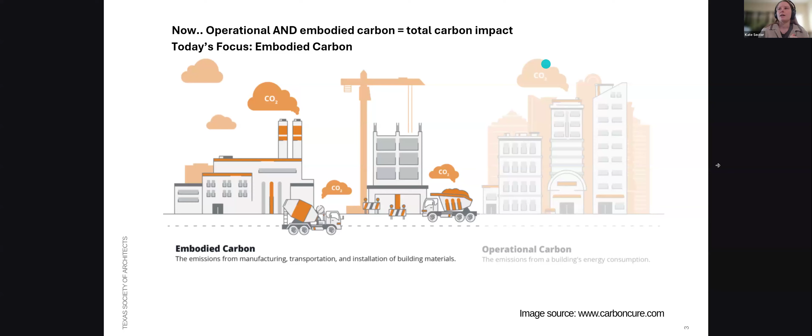But when you put those things together, we get our total impact that we can have as architects and the built environment. This topic is really important because, in addition to our building operations, we also are able to impact our carbon emissions through the materials that we select. Something that we really have a true impact on, especially certain materials like iron and steel, cement - these have quite a big impact globally on our carbon emissions, which is why we're really trying to hone in on how we can impact carbon emissions beyond operations.

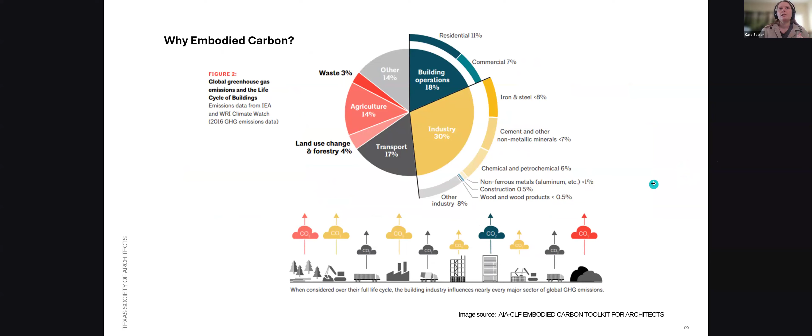One of the things with materials is that we select them right away, and so that carbon impact, that upfront carbon impact, is something that you see the second that you select those materials and they get implemented, versus operational carbon, which is the whole lifespan of a building. Both are equally important, but when we think about things that we can do right now, today, our materials are extremely important, which is why we want to see people reporting these impacts more and more.

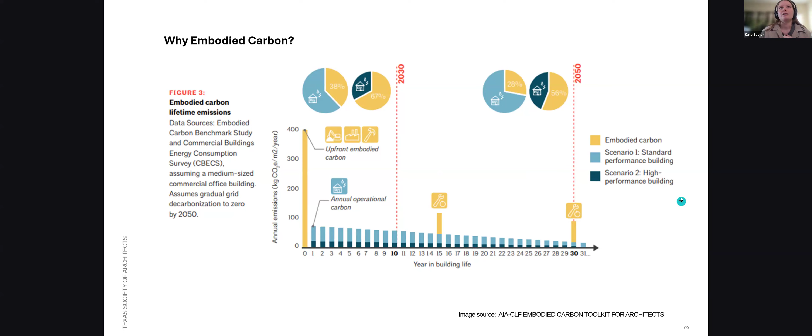If you're not familiar with how to measure embodied carbon and some of those life cycle impact stages, these are some important terminologies to know that you'll see in the 2030 reporting project categories.

So you have your product stage, which is A1 through A3. You see these on things like environmental product declarations. This is the material extraction, transportation, and manufacturing of a product.

There's construction phases, which is A4 and 5. Grayed out here, I have the use stage, which is actually, part of that is the maintenance and repair, but also your operational energy, which is a separate reporting category, and then the end of life situation.

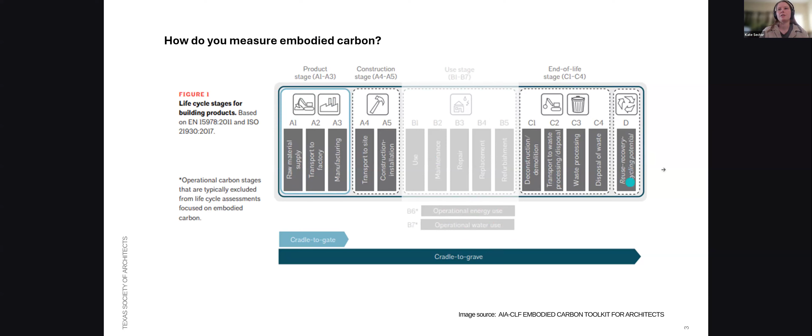All these graphics that I just showed are part of a really great resource that the AIA and Carbon Leadership Forum have put together, which is a toolkit for architects. I highly recommend it. It's a 3-part series that goes through introducing embodied carbon, measuring, and then strategies for reducing.

So the DDX platform is something you log in to access once you're signed on for the commitment. It's a nice online platform to do your reporting. If you're going to be reporting a project, it really only takes 5 to 10 minutes. It's quite simple once you have your data collected.

You then need to know your occupancy year. This doesn't have a huge impact, so just make your best guess if you don't know. But an important aspect for the operational side is knowing the correct energy code to put in here. You then need to know your use type, like is it an office, a residential project, whatever it might be, and the conditioned area in square feet.

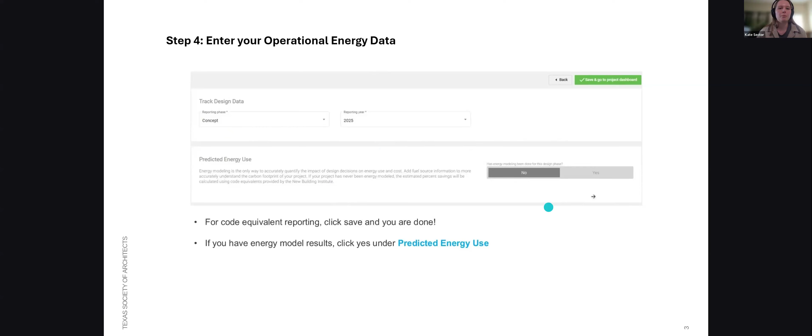But if, say for example, you only want to report embodied carbon and you only have a code compliant building, you just hit no and then move on. This is going to say that I have a code compliant building and I'm just focused on embodied carbon, for example. As you scroll through, this is all on one page.

Once you hit track data, you scroll to the bottom, and that's where you see embodied carbon. Again, technically with reporting, it's just about transparency. So if your project is code compliant and didn't do embodied carbon analysis, just keep everything on no. We still want to know that project exists in the world and that it didn't do these things. Reporting is whether you're high performing or not—we still want to see that data.

So it's totally okay to hit no if you're not reporting that this year, or maybe you only want to report a couple projects. If you are going to be reporting, you just click yes instead, and a drop down will populate on that same page.

If you are going to report embodied carbon this year, it looks different than past years. They've added quite a lot of new data and interface collection for this. You input things like your modeling year, your tool version, project phase, but most importantly, they're asking for this in square meters, so make sure you're filling that in properly. Also, who did your modeling in the tool that you used?

From there, there are two different options you can do. One is a detailed entry analysis, and the other is just like an override, which I'll show in a second. Again, the little asterisks show the stuff that you need.

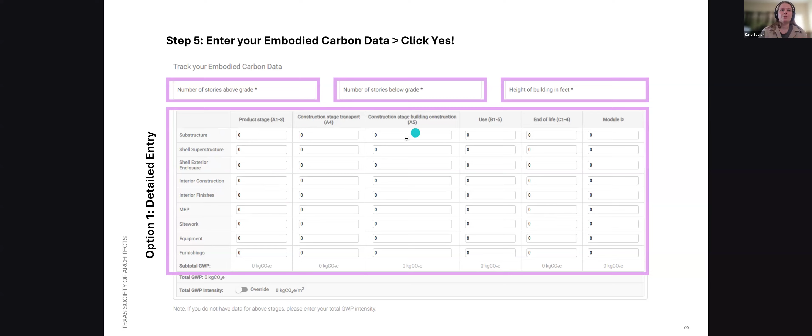The reason I explained the different life cycle stages is because this carbon reporting allows you to enter quite a detailed amount. On the left-hand side, we have different categories of the building you can report on, and then your different life cycle phases. If you only did structure, that's okay, just report that. Or maybe you didn't do MEP and site work, just fill in what you have. The more we can fill in, the better, but it's okay to just do structure and enclosure, or maybe interiors, whatever works best for your project. But if you don't have this detailed breakdown, say you used a simplified tool and you only know your total kilograms of CO2 per meter squared, you can just do the override and enter that too. Just make sure you're paying attention to the unit here, kilogram CO2 equivalent over meter squared, not just kilogram CO2. So two different options you can do here, detailed or simplified version.

Additional optional data that would be helpful for the 2030 group to know is reduction strategies—what did you do to help reduce embodied carbon on this project? It's just a narrative. And then biogenic carbon—did your LCA include the sequestration and biogenic carbon impacts?

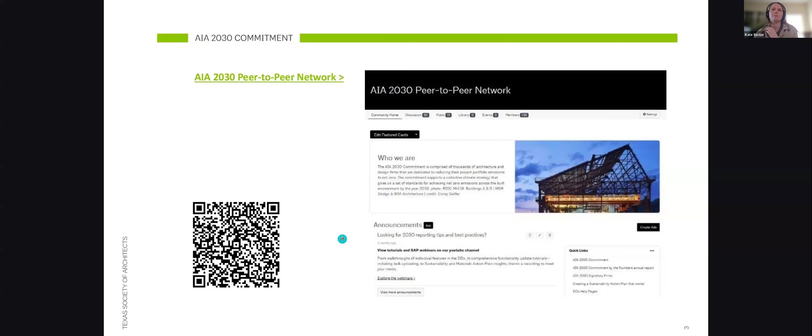Briefly, some resources. If you need help in this process, for general 2030 related things, there's a whole 2030 commitment contacts list, and they're doing some webinars—there's two left right now on how to submit your portfolio and last minute questions. There's also this really great DDX support page, and I'll post some of these in the chat, but it goes through tons of detailed information about this process. If you have questions, reach out to the folks at AIA or start with this support link. They also have an AIA 2030 peer-to-peer network group, so you can post your questions and see what other people are asking online. Again, I'll post some of these in the chat.

So that was just a quick run through. You're welcome to ask questions in the chat—we can talk about them later about embodied carbon—but I really just wanted to give the floor to our guests today. So we have Philip Smith, Chell, Ty, and Jack, who are going to be doing some case studies about how their firms are incorporating embodied carbon into their workflows right now. I will hand it off to Phil.

Stop sharing. Hey everybody, can you hear me? Yes. Okay, so let me make sure I'm sharing the right screen. One of my favorite pranks during the COVID years was to say, hey, did you mean to share screen, on any meeting.

Anyway, my name's Phil Smith. I am an architect with DLR Group. I have been at this firm for 4.5 years. In that time, actually just since 2018, that's when studying embodied carbon really became popular. I say popular, although in those early days it was really just Carbon Leadership Forum, and I think it started out of University of Washington—Chell can back me up on that when he talks later. As a firm, we have been wrestling for years on how exactly to do this measurement, on how to structure a firm that is right now, I think, 1,800 employees, and we're growing more and more every year. We're targeting lots of growth.

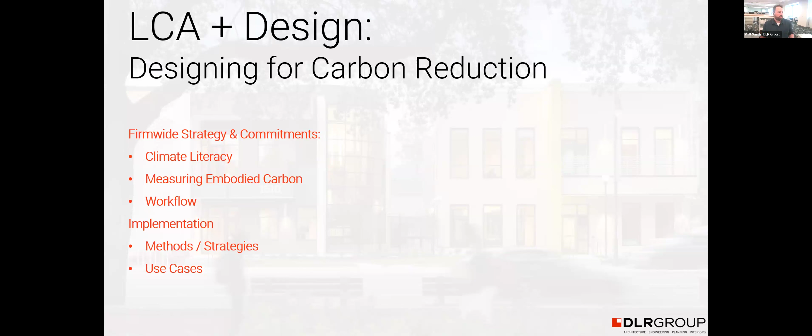So, thanks Jack. We've been looking at a lot of different ways we can incorporate sustainability into our culture. We have been focused on carbon, operational and embodied, for the past couple of years. This year we're starting to widen out a bit more to things like water, resiliency, health, equity, and so on. So we have a pretty rich history in terms of reporting carbon. But even still, as a firm this wide, 100% employee owned, there are lots of variances. This is something I have been tasked with, within the architecture discipline, in terms of trying to figure out how we can narrow it down. Part of this is climate literacy—making sure all of our employee owners understand what we mean when we say embodied carbon, understand what the platforms are, and just get this basic level of understanding lifted across the firm.

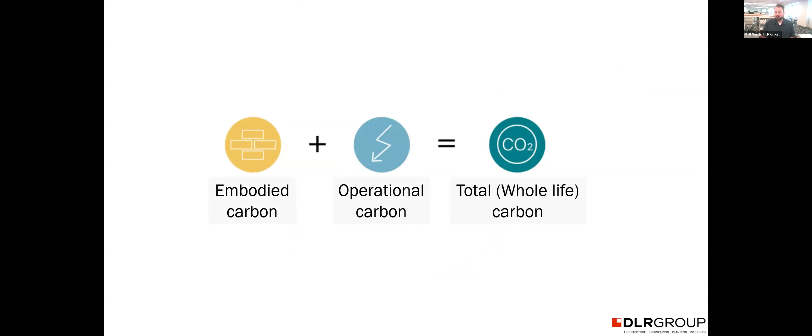Kate did a great job explaining this, so I'm not going to get into it too much. But when I say we've been targeting carbon, it's embodied and it's operational. We also have a big focus on site, making sure that we're looking at our pavement and things like that.

Here is kind of where we were heading with that graph, that Carbon Leadership Forum graph about the embodied carbon in a building. This has been a focus since about 2018. We've been really focusing before that on operational energy. And so now as time goes on, our operational energy has really shrunk. But what have we really done for embodied energy? Like I've been saying, it hasn't been consistent, at least within our firm.

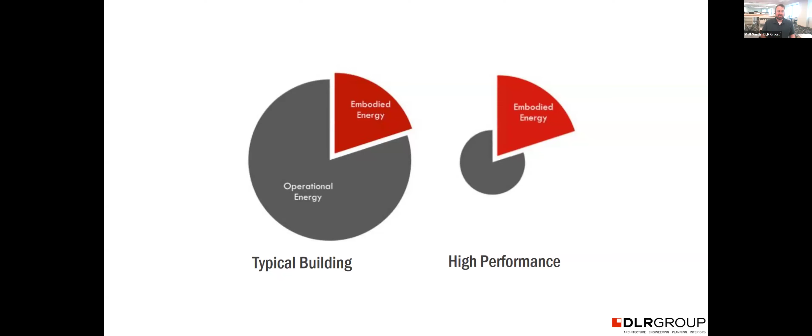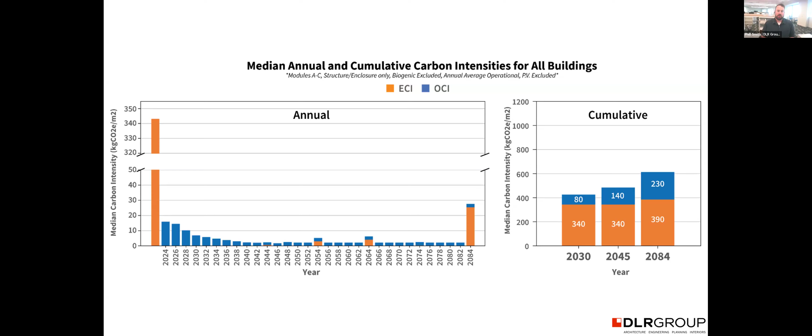This is a graph that looks familiar. Again, Kate kind of covered this already. It's a matter of when are we calculating our embodied carbon. We've got that initial fabrication of the building and transportation of materials, et cetera. We have some sort of renovation after about 20 or 30 years, depending on the building. And then at the very end of the life cycle, we've got some sort of either recycling effort or scrapping the building. And in terms of measuring, we already saw something like this.

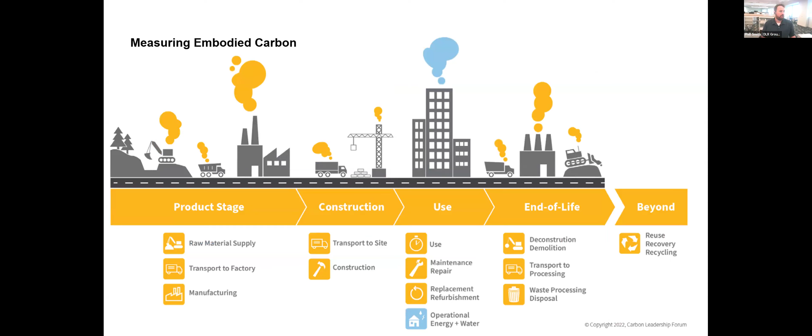So we understand that there's a product stage, construction stage. During the use stage, the operational lives there, and we have our end of life. And then we have what's going to happen when our project is done. Focusing on the whole use of the building is something that's been vitally important. Within the LCA, we are not focused necessarily on all of this, but we are making sure that we're at least keeping in mind the cradle to cradle mentality.

So we already talked about the AIA 2030. As a firm, this has been a real sticky topic. I do represent the architecture discipline within our embodied carbon working group, but we have all of our disciplines. We're an integrated design firm. And so structure has really been leading the way, and they have really focused on Tally.

Tally is a Revit plugin, and this is something that can use your Revit geometries to, basically, get material takeoffs, and then it can transport that information into EC3 so you can assign your environmental product declarations.

C-Scale is another really important tool for us, especially early on when we're comparing different things, or if we're wanting to submit for DDX and we don't necessarily have the project budget to run a full Tally model, because Tally is a lot more intense. I'll get a little bit more into the weeds on the difference between these two and how we use them.

Oh, actually right now. So with C-Scale, we really like it for our early phase stuff. We really like the cost part of it because this is something that everybody can use. It's very user friendly. You can refine your scope, you can override your defaults, you can make it work for your project. It's just a really user friendly way of getting basic embodied carbon data.

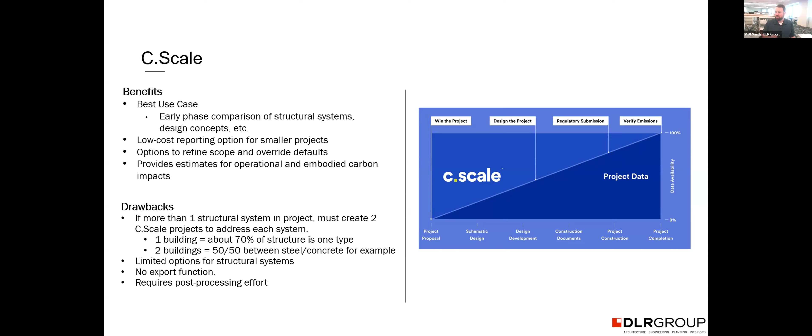Now, obviously it has drawbacks because it's meant to be so user friendly. And actually there's a C-Scale person on the call, so I'm sure he is going to be talking about this even more than I do. So I'm just going to move past this one to Tally.

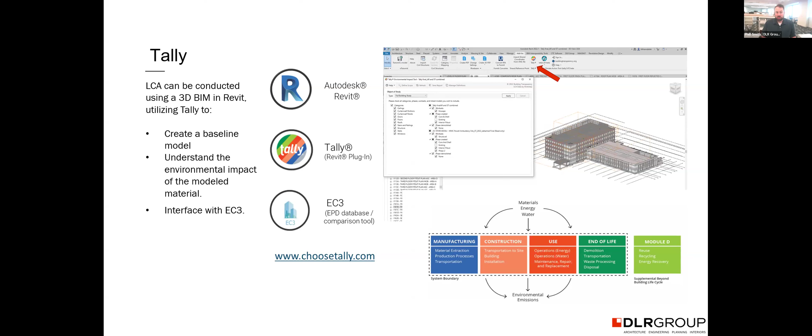As I mentioned, this is a Revit plugin. You can create baseline models, you can compare other models. There is a lot more to learn with this software platform. And once you get it, you can get really great information. There are many other platforms out there that are maybe not as cost effective. You probably are familiar with OneClick or some of the other ones that others use. I've used them too, and I also like them. But as a firm, we're really looking at C-Scale and Tally.

So as a workflow, it's not just a life cycle analysis for the information to be submitted to DDX.

Even though that is a very important part of this, because we are committed to the AIA 2030 cause, we actually want to do something with this information. And so we're trying to figure out when to do life cycle analyses, what kinds, and what are we actually looking at in each of these phases.

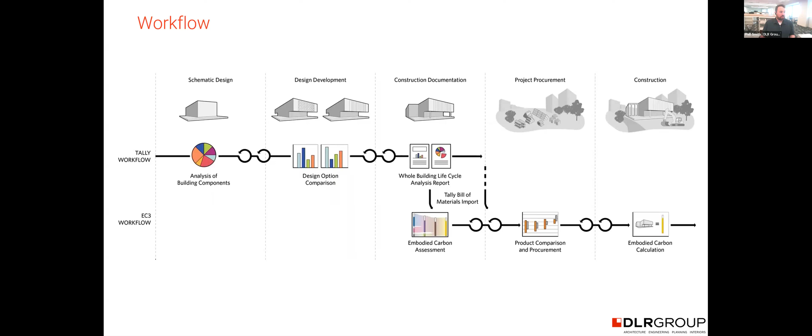Within our schematic design, we're really looking at our building components. When we're looking at design development, we might have two options and we can actually compare between the two. When we're doing CDs at this point, we're looking at something more summative—a full-on report where we're actually assessing the embodied carbon. When you go to project procurement, it's possible you're going to get some product data in and you want to compare things.

And finally in construction, we're going to do our final calculation, and that could be for certifications or other things. For this first one, whole building life cycle analysis versus the comparative—this is just your initial snapshot versus your actual systems. So if you are wanting to compare two materials, or compare your cladding systems differently, you would do a comparative life cycle analysis.

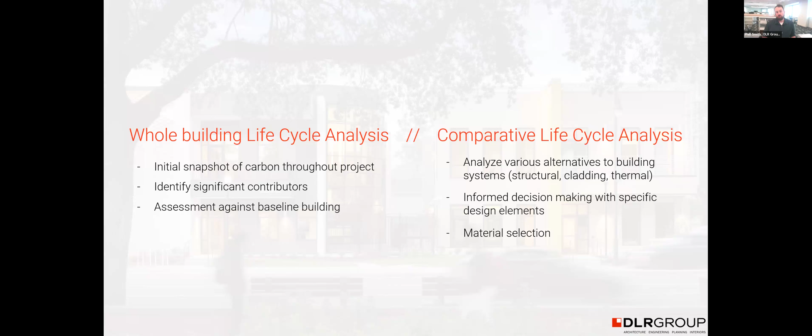You wouldn't want a whole building analysis because that takes a lot of time. If you are going to do a whole building, then this is basically going to be your way of communicating with the client or with certification experts—this is what you think you're contributing to your carbon footprint.

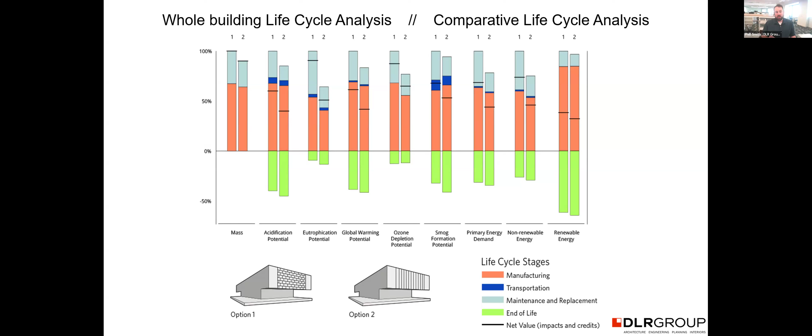So an example of whole building versus comparative: in this case, we were looking at a facade, and within this facade we very clearly see one outperforming the other. If this is a tie—if everything else is a tie, like we like both designs—at that point we can look and say, here's our tiebreaker. Or we can make this a priority and say we're really going to focus on making sure our building has very low embodied carbon, in which case we might start from here and then refine further.

Here's another example of an analysis. This is a comparative life cycle analysis, and we're just looking at the facades—a great maple versus a tangential maple, a radial maple versus a tangential maple, versus just a solid. So those were the three that we had looked at. We can see in terms of their output how they perform with one another.

And so if you're following this line here, there actually is a difference in these facade systems. In this one case, it's a matter of this steel sheet and how much that contributes to the overall embodied carbon footprint.

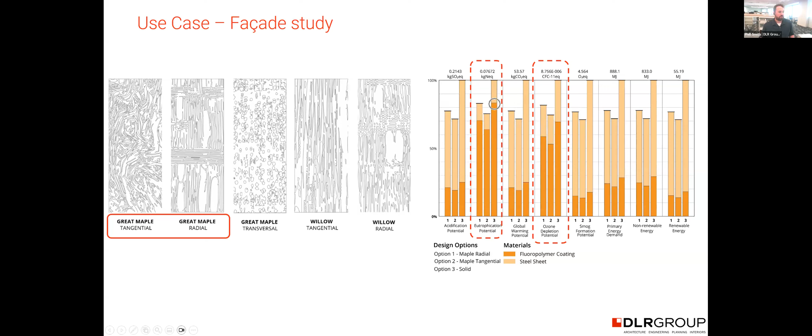Another case, you might look at your wall assembly and try to narrow down where you can reduce your embodied carbon—what is it in this assembly that's causing issues? And so in this case, we're just looking at a wall section, a typical wall section.

And this is an output from Tally that you can get. It will take your wall system and divvy it up into what is taking up the most space in the carbon footprint. In this case, we can see that it's a Division 7—we're looking at this polyiso board. So what can we do with that information?

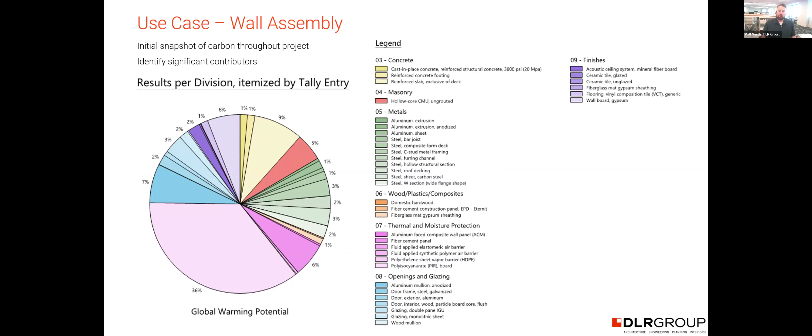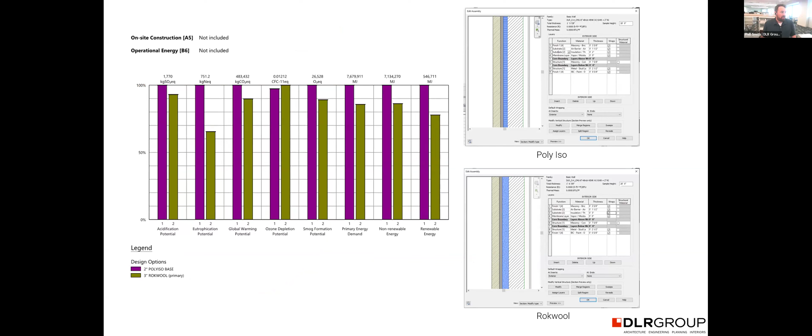We can actually take a peek at each of these styles. In this case, we're evaluating the polyiso base versus a Rokwool, and across the board we can see that Rokwool is outperforming, except with the ozone depletion potential, where it's pretty close. And so again, if everything else is even, this can be a tiebreaker—obviously cost is going to be a big factor in these sorts of decisions.

I don't think I'm quite running up on my time yet, but just in case, this is going to be the last thing I show: the Ismaili Center. This is a new project here in Houston. It's been transformative for the community—everybody has responded positively to it. I've been out there a few times already.

I got to see it during construction. This is just a really great project to look at for so many reasons, and one of those is the amount of fly ash you can actually put into concrete—it really shocked me.

And so to start off with, this is LEED certification. We were looking at the different LEEDs we could get. If you go with version 4 LEED, you have to implement changes to your analysis required for that 10% improvement in 3 of those 6 areas.

In version 4.1, you can actually get a point when you run the analysis, and you can get additional credits for achieving reductions as compared to a baseline. The establishment of that baseline can get a little complicated, so I'm not going to get into that today, but in this case I do have a little note here on what is required for that baseline.

So in looking at what we're doing to actually lower our embodied carbon for the Ismaili Center, we have ways of evaluating the building and trying to figure out exactly what it is that we're measuring. And so we can break up our life cycle analysis into different components. You have your exterior screen shell, you have your structural model, and you have your architectural model. And when you're looking at each of these, you can compare what's happening within each of these systems, or you can just kind of get your summary number from the whole thing.

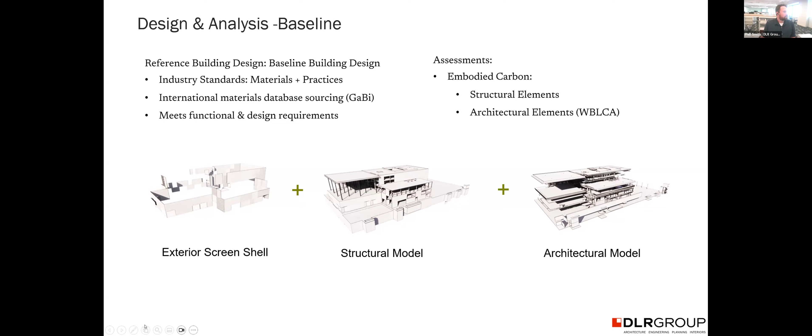It's basically just math. What's your exterior embodied carbon load? What's your structural embodied carbon load? And what's your architectural? What we found, next slide, please. There we go. In terms of where our embodied carbon was, it's no surprise that would be concrete, right? And with the concrete, we're looking at all sorts of other things like eutrophication and other environmental concerns. But in terms of the cement production within concrete, that's really the major contributor here, to the point where it's about 76% of the global warming potential within the project.

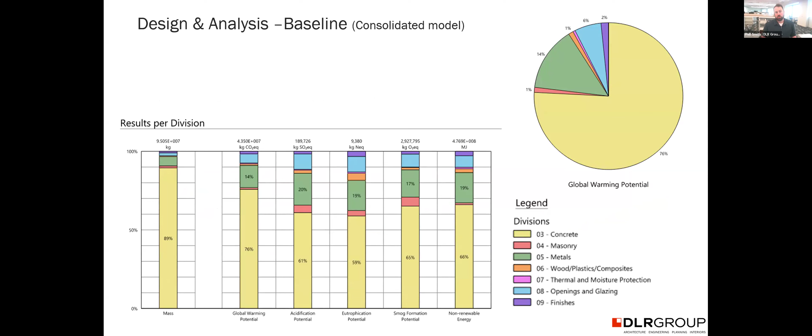In looking at it by material, just within the concrete itself, you can see that we've got our admixture. We have quite a bit of fly ash. We've got our fiber reinforced concrete, more glass fibers, et cetera. And the nice thing about Tally, and there's some other things that do this, is it can break down where your different components are coming from. And so in this case, it's the structural concrete that has a lot of that cement in it.

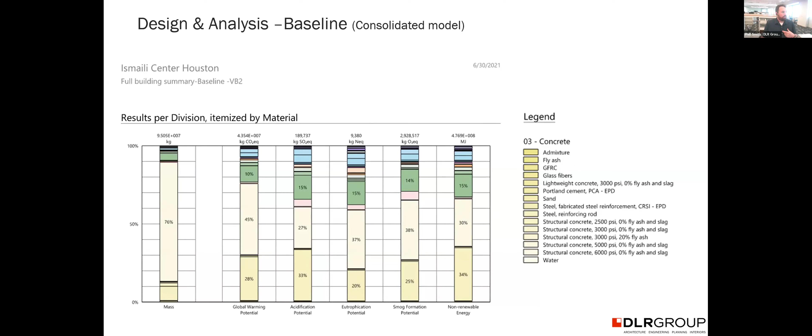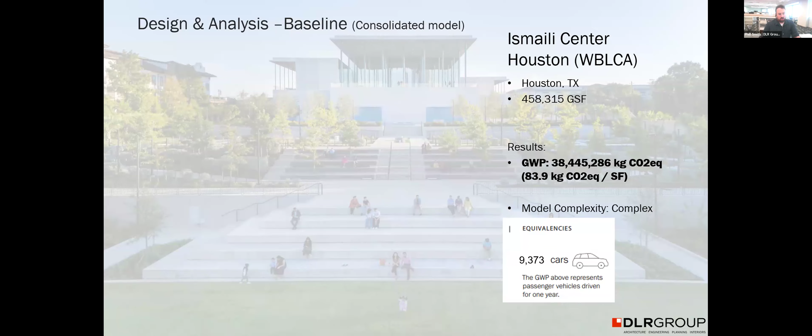And so what we ended up with at the Ismaili Center, we ended up with a reduction of, I think, 8%. The global warming potential was 38 million kilograms of carbon dioxide equivalent. And so it's the equivalent of about 9,000 cars just with the concrete. Now, to reduce this against that baseline, we looked at a couple of different things that we could do. So there was the fly ash being incorporated into it.

Now, something really prominent about the Ismaili Center is the color white, just how the colored concrete manages to look so vibrant. And when you add fly ash, we know that that can kind of gray things out. And so work with your general contractor early on to make sure that you can get that color. Our architect of record for this project has a lot of stories about her interaction with the contractor on this project. But towards the end, we ended up with 35% fly ash in just the general structural concrete. But any architectural concrete is more than half fly ash.

Now in Texas, I'm sure there's going to be questions on this. Sure, I see Margaret's note in the chat here. There could be a longer cure time for these lower carbon admixtures. And so this is something, again, you just work with your GC about to make sure that it gets scheduled out correctly. But yes, that can absolutely be a concern.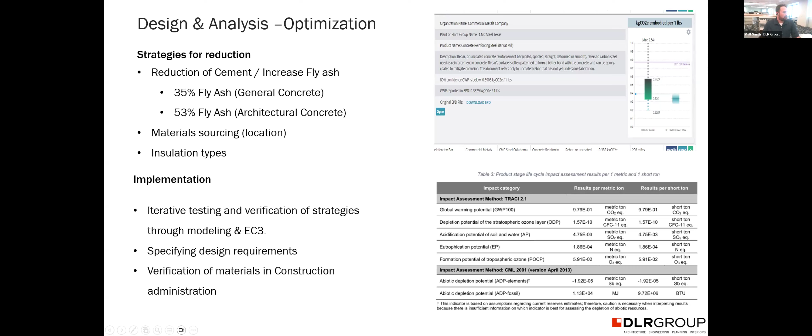The other concern is where you're actually getting this fly ash from. Fly ash, as probably most of you know, is a byproduct of the coal power plant. And so if there aren't a lot of coal power plants around, you're going to have to ship it in from somewhere. But even still, the carbon footprint of cement is just so high that it typically is always worth it. And that is taken into account with our Tally model, by the way. And so in the end, we had an 8.7% reduction across the whole building life cycle analysis. So it's almost like by incorporating all of that fly ash, we took 730 cars out of the project.

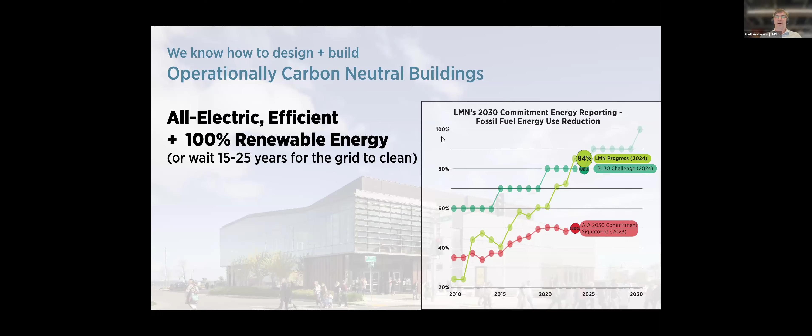So what does this mean for us? It means that as we reduce operational carbon, as has been said before, embodied carbon is all of our remaining carbon pollution. So starting in 2020 or so, we analyze embodied carbon on all of our major projects using Tally. We put all of our analysis into a database, and you see on the right,

concrete and steel are basically 2/3 of all of our embodied carbon that we've tracked. So it's an obvious focus. But of course, this database is mostly structure and envelope. So there's a lot of things that are just not here, like MEP, site work, and other things.

We've also figured out how to get to about a 30% embodied carbon reduction in concrete in every market across the US. So we meet with a structural engineer, contractor, sometimes concrete suppliers, kind of like what Philip was talking about, to understand which mixes can include very low carbon concrete and which are more time sensitive, and we should maybe just use more of a standard mix. And we have good spec language now to address all of that.

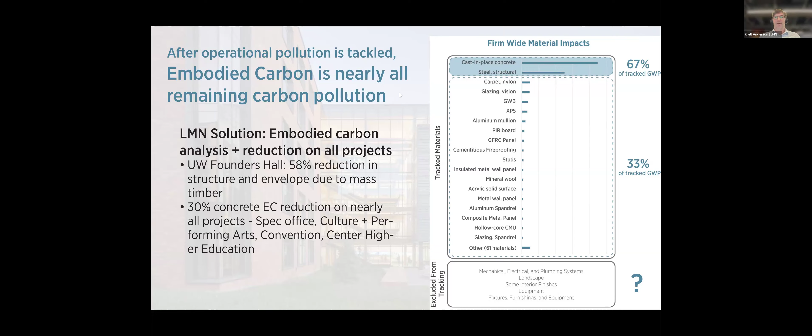Since structure is a major part of embodied carbon, we have a detailed list of what can be done in each phase for structural embodied carbon. This is part of a free online resource we call the Path to Zero Carbon series. That's on our website. I'm not going to go into it in detail, but there are opportunities at all phases to reduce structural embodied carbon, and most of these are cost neutral, as we've seen on many projects.

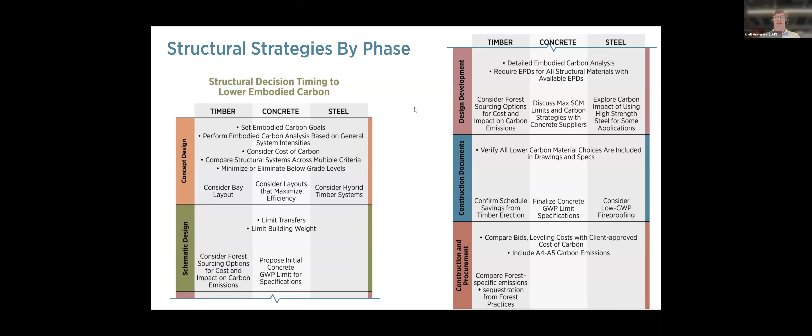So here's how we set ourselves up for success. We do embodied carbon analysis on every project. We have education on how to read environmental product declarations and other things, how to use EC3 to find environmental product declarations and compare them. We have internal groups that research the most advanced practices and bring them specifically to project teams. And another thing is we have staff actually do the embodied carbon analysis rather than specialists.

And what that means is as people struggle with software, they learn it. They learn the terms and the sensitivity around what is important and what is not important in reducing embodied carbon. We do have specialists QA the reports, but having staff do it, we find a lot of success. You can see the tools we use at the bottom, which is Tally for all of our projects, and that includes LEED credit, but also just the basic analysis.

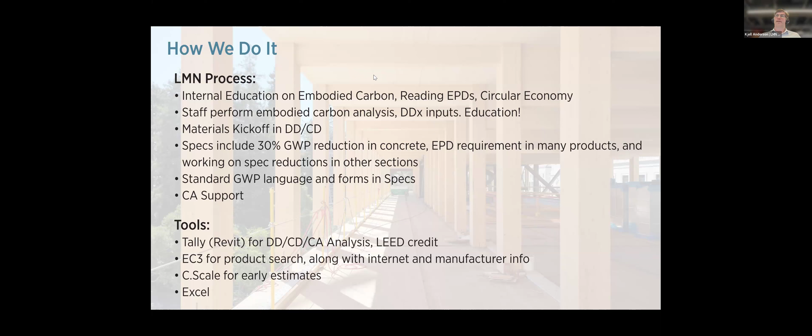We use EC3 to search for products because it's got a great database. We use C.Scale for early estimates. And we use Excel for a lot of post-processing and making sure that we understand the data, and all the tools are imperfect in their own ways.

Here's the first case study, Founders Hall, that recently won a COTE Top 10 award. We were able to steer the design toward an all-electric mass timber building, which significantly reduced the carbon pollution from it, and also is biophilic. It's beautiful to be in. It's light-filled, and it's got this warmth, and we also don't need ceilings in a lot of the building because it's mass timber and beautiful.

Skipping a lot of the how, we also analyzed all of the embodied carbon that we could using data available in 2019 for this project. The diagram in the upper right shows a few things. Since the mass timber structure reduces embodied carbon, and all electric with mostly renewable energy reduces the operational carbon, the rest of the pieces get fairly large comparatively. We see this as kind of a bellwether for where our industry is going. So landscape, MEP, refrigerant leakage, interiors, all that are big pieces.

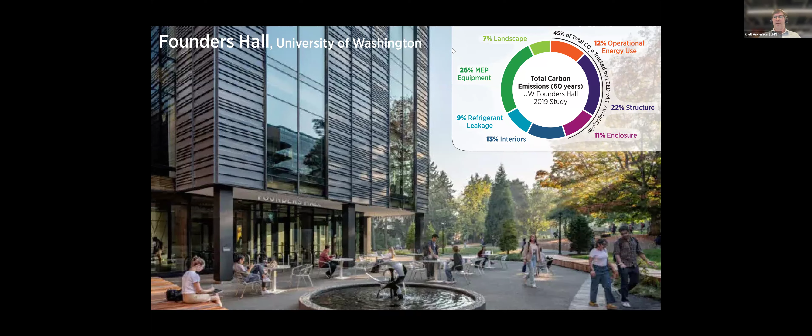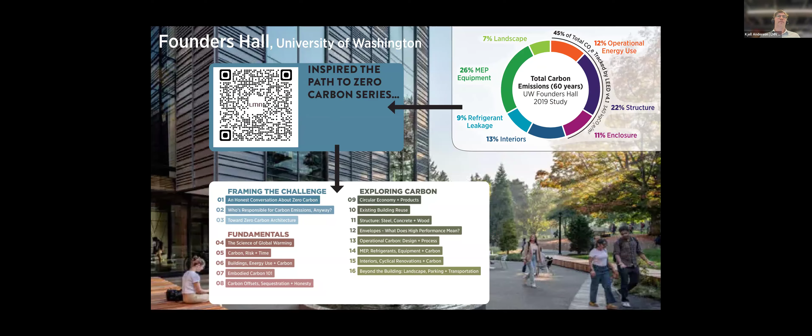And in fact, this kind of told us this is where we need to go with our advanced practice, which is let's focus on the things on the right, but we also need to have an awareness of the things on the left. And this led us to do the Path to Zero Carbon series that I mentioned earlier. This is a super deep dive, graphically illustrated, into all the pieces of getting to a carbon neutral building, because there's a lot of claims out there of carbon neutral buildings, and there are none in the contemporary world. So we wanted to kind of figure out how to approach that. It's free online, so go there and learn something from it, or make comments to us if you have comments on it.

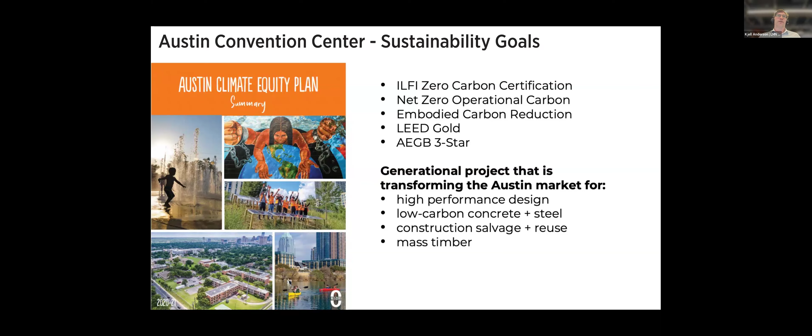The second and last case study is a project currently under construction in Austin. It's Austin Convention Center. It started with some lofty goals, including Austin's plans for climate equity and several other documents that address community and climate. But the design team, as always, has to figure out how to turn that into actionable goals. And we turned that into ILFI zero carbon certification and a bunch of other goals that you see on here, including LEED and Austin AEGB. Partway through construction, it's still on track to be the first ILFI zero carbon certified convention center in the world at around 1.5 million square feet.

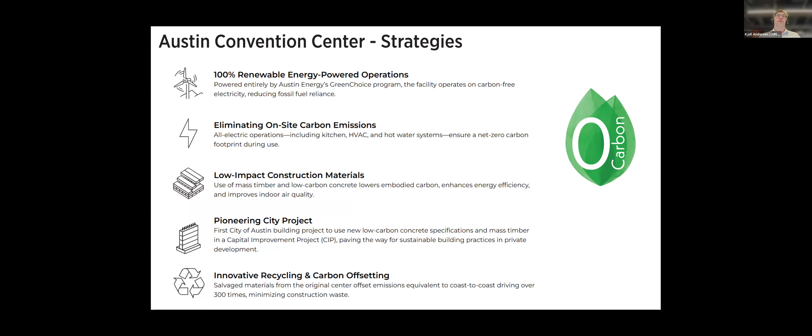So here's some strategies, including all electric operations, all electric kitchens, 100% renewable energy through Austin Energy's program. And it pushes the boundaries of embodied carbon in the region in lots of ways. All of this fits within a budget, and the budget for sustainability is a very, very small percentage of the actual cost of the project. So here's some specific strategies. Reducing the weight of the building is a primary one. Reducing excavation. There's a lot of below-grade program for this, and those are big pieces. We don't get credit for those, but they reduce the actual embodied carbon.

We started analyzing embodied carbon very early in the project in concept design when we only had a cost estimate for material takeoffs, and we were able to turn that into a rough estimate and figure out how we were doing. The region actually has fairly low embodied carbon concrete already, so reducing this has been a challenge. There's a new slag plant in Houston, and getting some slag into some of the mixes helped us reduce beyond that. We also incorporated mass timber into roof structure and ceilings, which was a cost and carbon win. We also increased the strength of the steel, which reduced the total steel weight, which was also a cost and embodied carbon win.

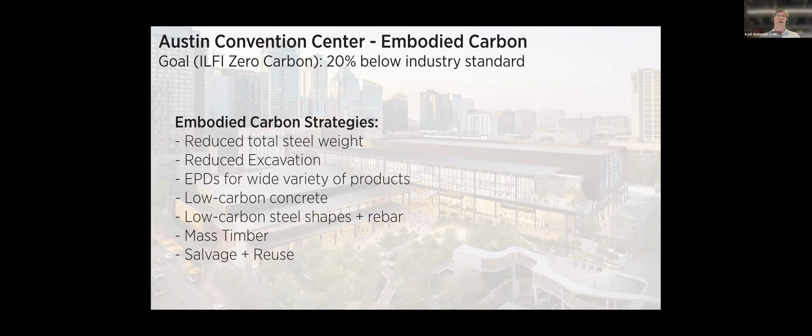We worked on low carbon steel with suppliers, rebar, aluminum curtain wall, many other materials and envelope and interiors to reduce that. And it's been an awesome team. If you look up this project, you'll see the team, and they're awesome. One of the biggest opportunities to reduce embodied carbon we have is salvage and reuse, and that's something we've really pushed on this project.

Digging into it just a little bit. Before the existing convention center was demolished, the team did multiple salvage walkthroughs to see what was useful, and we talked to the contractor with a list of 20 or more materials to estimate the cost effectiveness of salvaging and reusing each material within the project, self-salvage. We ended up with a list on the right, including 60-foot trusses that are actually taken down now and stored and will be reused in this outdoor pavilion in a warehouse building, as well as 10,000 square feet of metal panel cladding, some grating, mesh, and interior panels. So this is about 600 metric tons of embodied carbon that were saved by salvaging and reusing this.

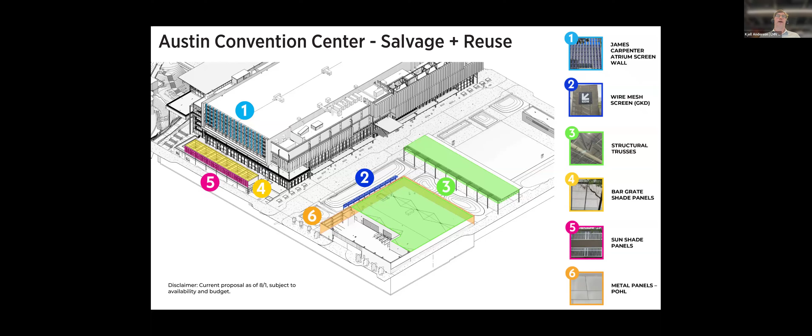And this is a bit of what some of the strategies look like. You can see some of the trusses on the right and the metal cladding panels being taken down on the right, the sunshade bar grating in the existing location on the left, and where it's going to go on the new building, and some of the mass timber. So with that, that's a super quick dive into a couple projects and how we approach embodied carbon at LMN.

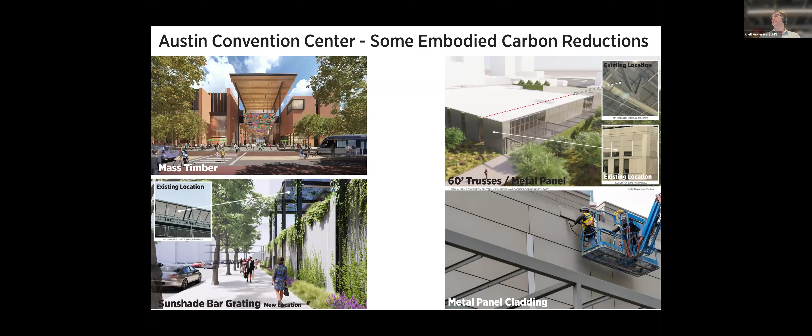My name is Tighe Lanning. I'm with CO Architects. I'll share my screen here in a moment. I've been with CO for about 10 years. I'm an architect and a project manager here, and have developed a specialty for healthcare design. I also have a long history of interest in sustainability. I actually worked for Ed Mazria and Architecture 2030 in New Mexico for a couple of years. After that, I was the COTE chair in LA, and have since moved to San Diego, but I've been working on really what we like to consider high performance, sustainable buildings that are quite large, quite complex, and I'll walk you through a couple of them now.

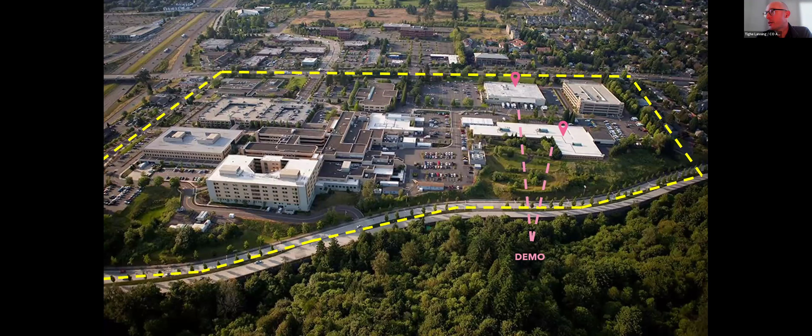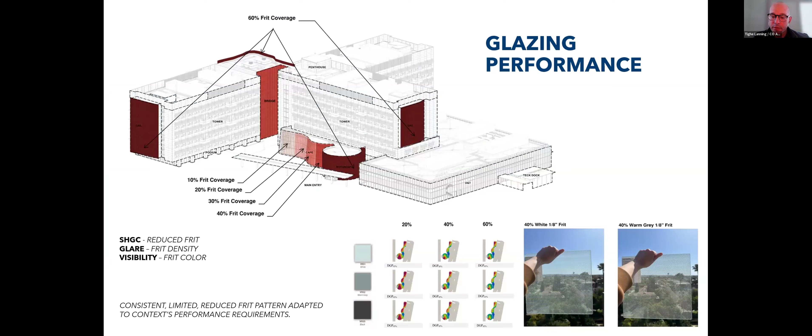About 615,000 square feet. We use shading—it's a very high performance facade, no shading on the north side, etc. I'm going to skim through here. Various frit patterns reduce glare and reduce solar heat gain coefficient, with a lot of attention to the type of insulation used. This was a site adaptation from a building in Southern California transplanted to a colder climate. So on the outside it looks quite similar, but a lot of detailing was needed to make it work in a new climate with much higher humidity and much more extreme temperature swings.

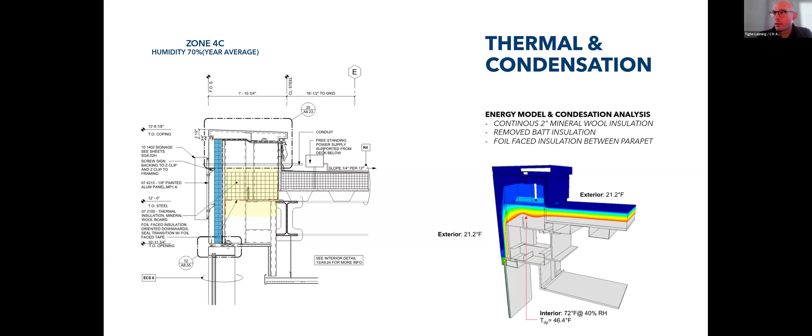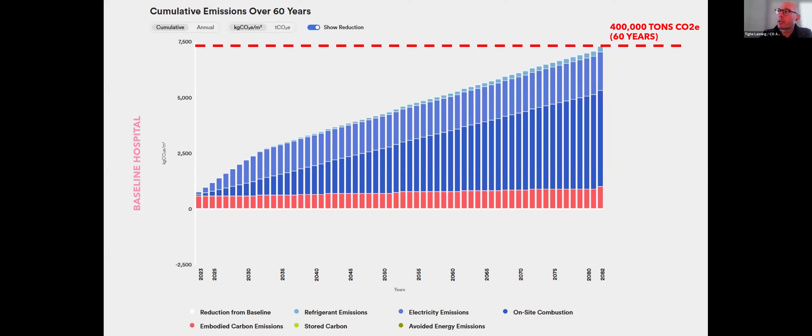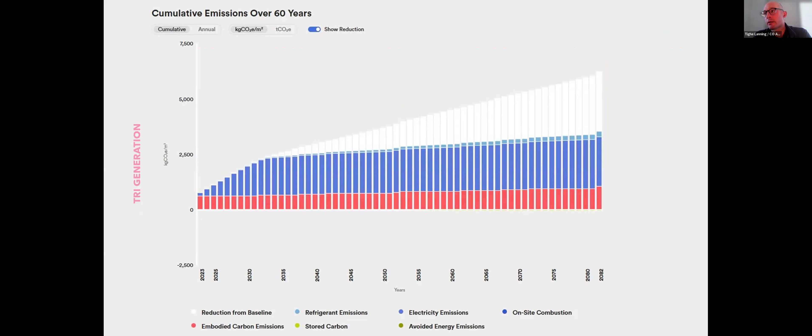This is a subsequent hospital that's been built, the first LEED Platinum hospital in the country. It has a tri-generation system, like combined heating and power but on steroids. It still uses fossil fuels and still burns them on site, but at a much higher COP. You can see the reduction in emissions over the life of the building is roughly half versus the baseline.

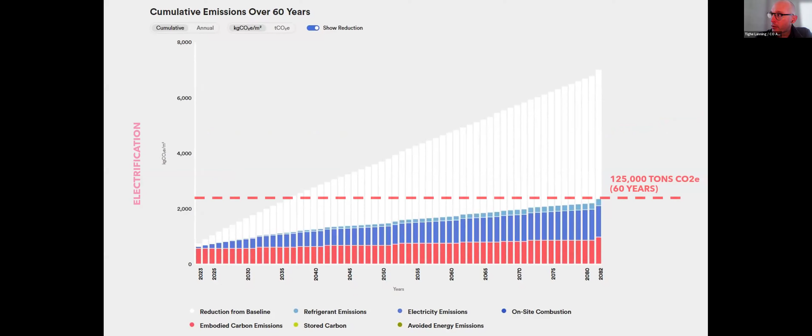Another project we completed for UCI was fully electric, another large hospital that reduced emissions even further—down to 125,000 versus 400. The current project is what we're showing here, and it's out of state. The grid is being cleaned up, but...

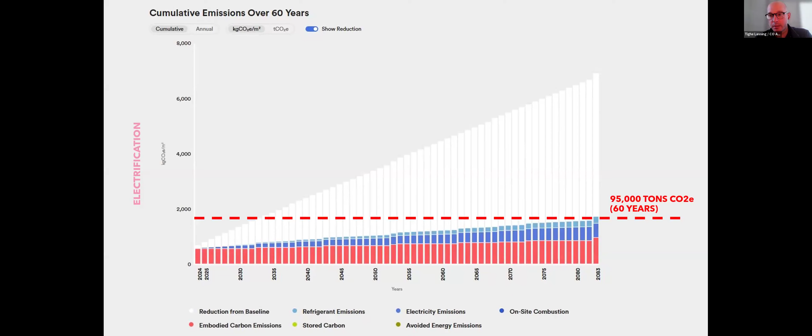I just can't skip the fact that for a project like this, our low-hanging fruit to reduce carbon emissions was really on the operational side, less so on the embodied side. We could get that red bar down, but we're already down to a quarter or less of the emissions associated with this project versus the baseline building. And of course, for that number to get to zero, both the red and the blue need to be tackled.

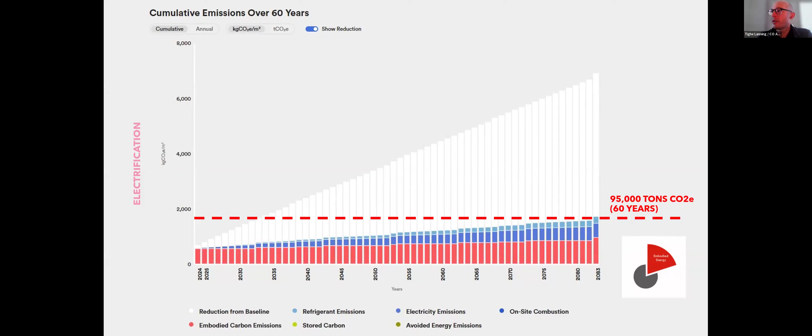It's underway. But the other building associated with that, and that's actually providing the power, is where we'll spend the second half of this. The Energy Center, a standalone, about 25,000 square foot building, provides all of the power for the hospital.

Fully electric. These are air source heat recovery chillers in the foreground on the right there. And this will be a fully mass timber building for the primary framing structure. That is a first for us, and it's a first for this client.

So I do want to point out that for repeat clients, you can't push on all fronts all at once. We can work with them and make incremental advances and go out on a limb here and there. We've been wanting to do a mass timber building, and this particular project is in a locale where it made sense, and we've been sort of holding that in our back pocket. They agreed to it.

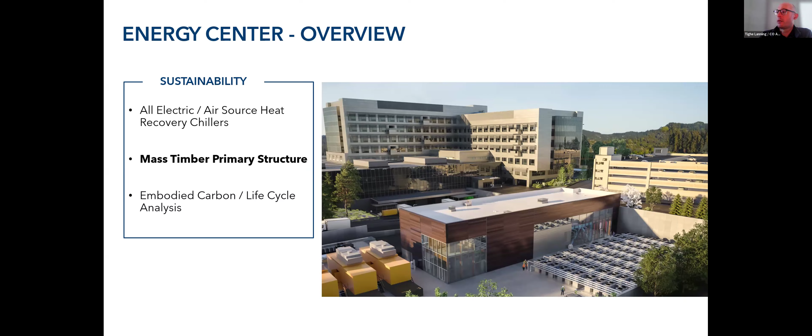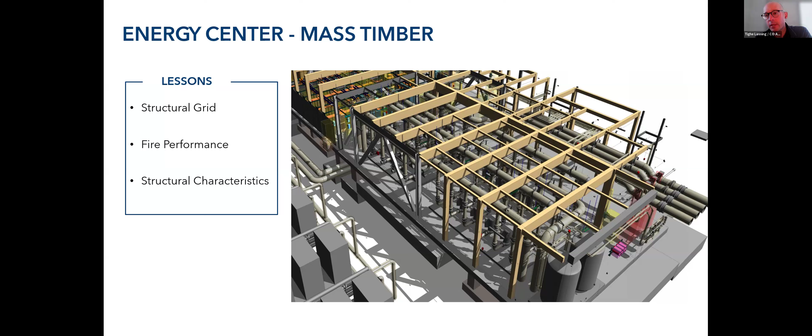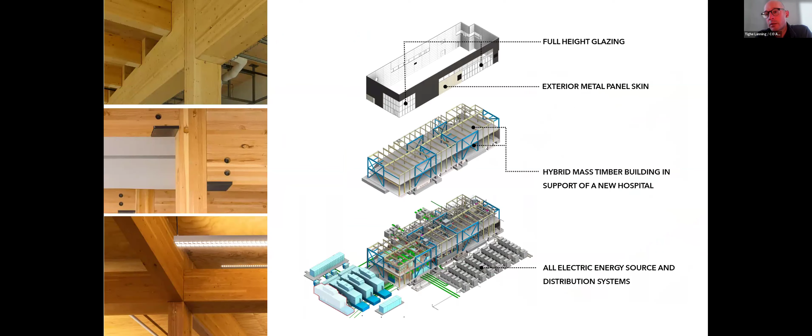I'm going to skip this and get to the good stuff. You can see the steel shear walls here in blue. And unlike every other energy center that we've ever designed, we actually really wanted to show the inside of this and make it public facing. So you'll be able to walk by and through, double story windows, you'll be able to actually see the timber structure. I hope it looks like Founders Hall. We'll see.

Okay, so getting down to the numbers for this project, we did have an LCA performed. For buildings of this scale, we do that out of house. So this was an added service for the client, which I'm happy to take any questions on how to approach a client with a suggestion like that. You can see the importance here of capturing the benefit of biogenic carbon versus non.

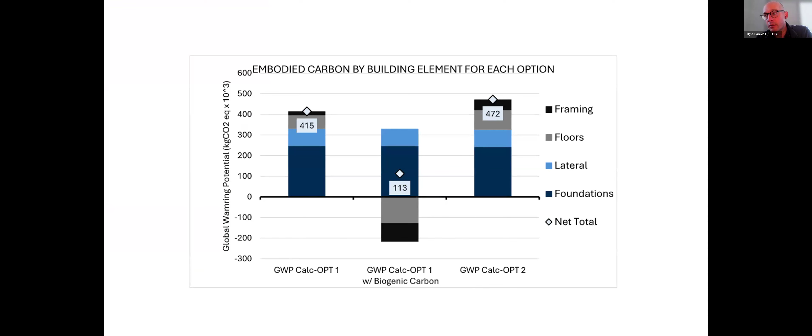This next table, I think, is probably the clearest slide. On the left is just mass timber, sort of you don't know where it came from, you don't know what it's going to, you don't know how it's going to be processed at the end of its life, at the end of the building's life. That 415 is not much lower than the baseline of 472 over on the right for a steel framed equivalent building. That's only about a 10% reduction in terms of embodied carbon. And of course, this is only looking at the structure, but that's going to be the lion's share of the embodied carbon.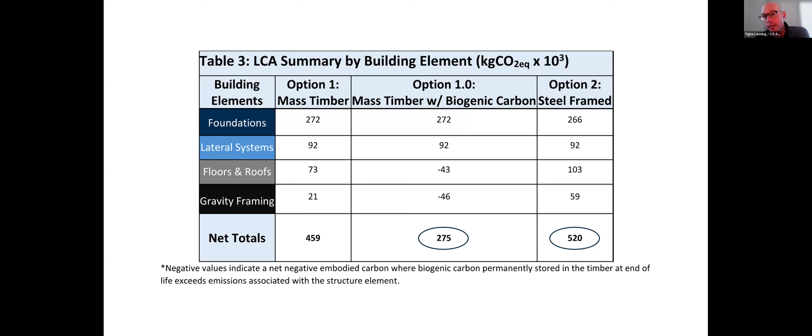And that's another main point of this presentation: if you're going to capture some of the benefits, you do need to spec it out, so the contractor actually purchases that product and not some sort of similar product that you might not be able to trace. That level of accountability, I think, is what our clients request and need from us so that they can actually get the building that they're paying for.

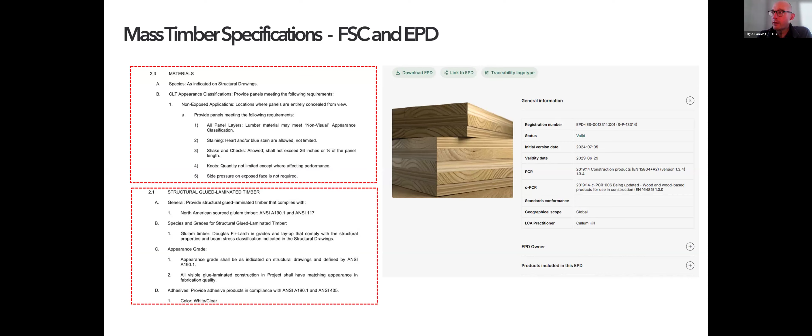And yeah, that's the end of my presentation. Thank you.

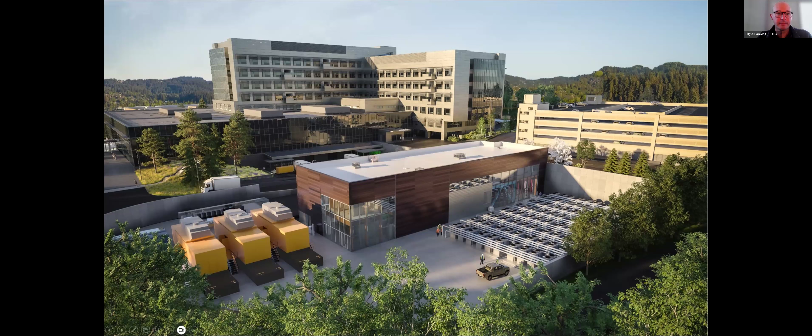Awesome. I'll pick it up from here, I think, and let's keep it pretty short, Kate, I would say, just to have time for questions. Is that right? Yeah, 5 minutes is okay. I know we're running a little bit long, so whatever you want to share, I think it's important. Cool, all good. No, really appreciated all of those presentations.

I'm going to give the briefest sort of run through, the summary version. I hope it's exciting that it can be very short about how C.Scale sees supporting the DDX, and obviously our goal is to make this very accessible. So I know that many people here are already C.Scale users. If you're not, we'll find some way to get you in whatever terms make the most sense to you. At the core of it, C.Scale is a whole life carbon modeling tool.

I think exactly to Tighe's point, there's this library renovation project that I'll use as an example. This is what the target scenario looks like. If you show the reductions, it looks like that.

You see that obviously there's been major reductions in energy use. So the whole life carbon perspective, the DDX is focused on this. You got to look at embodied and operational together.

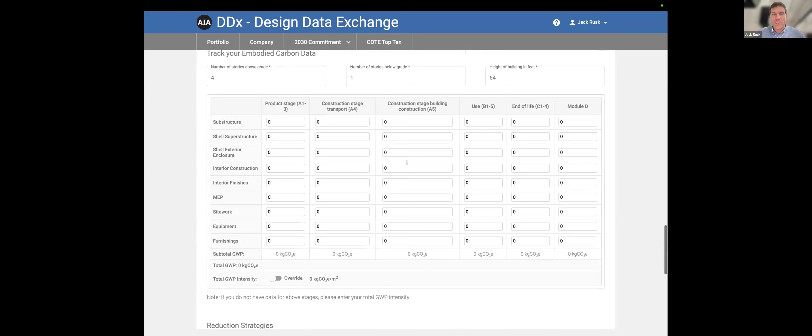I'm going to switch screens for a second to look at the data reporting requirements for the DDX embodied carbon. This was shown at the beginning as well. It's this form you have to fill out, and obviously with DDX reporting, there's somebody on the team doing the reporting that maybe isn't always the person who was the project designer.

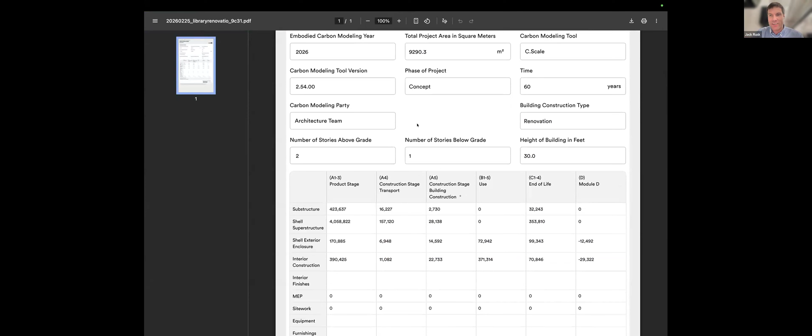Our goal for addressing this, which worked really successfully last year for firms like DLR, is to just have a PDF export from the project. It'll take a second to generate, and it'll save it. It just matches field for field and column for column the data that you need to enter, to move it from the report here to here. Whether you're modeling in a little bit of detail or a lot of detail, the whole thing is just to exactly match every field in every place so that a designer can have one on each screen.

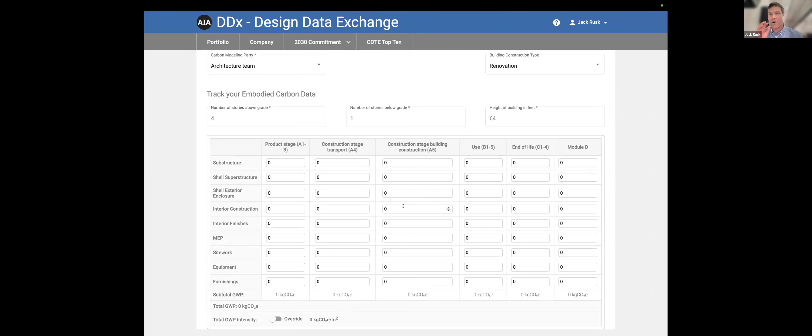Until this is automated in the DDX, this has felt like the best way for firms to do it—just a direct match from one data format to another, so nobody needs to guess what the A5 emissions from interior construction is. You can just move the field over.

So that's reporting on the project level for embodied carbon. There's another thing we've been working on that's been exciting, which is helping with the bulk exporting. I know this is always a touchy process because of the way the DDX manages data, so I encourage you, if you're looking to try this, to talk to us and we can make time to do it together.

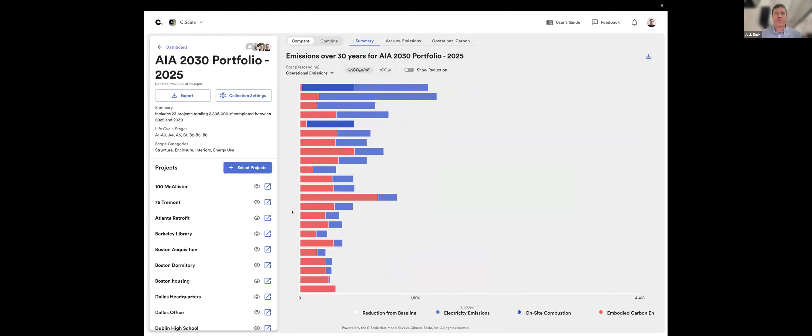In addition to modeling project by project, folks in C.Scale look across a portfolio, whether it's a campus of buildings or an internal portfolio, to do things like benchmarking and understand the differences between EUI and operational emissions. You can see that they stack up fairly differently.

As these portfolios come together, you can also export bulk reports. This is 20-something projects, and what this will do is generate the spreadsheet that you can then use to bulk import to the DDX. I've done a pretty good job matching the DDX and all its requirements for the way the different fields are formatted, and that really is something we hope helps with this reporting process, not just for one project at a time, but for many.

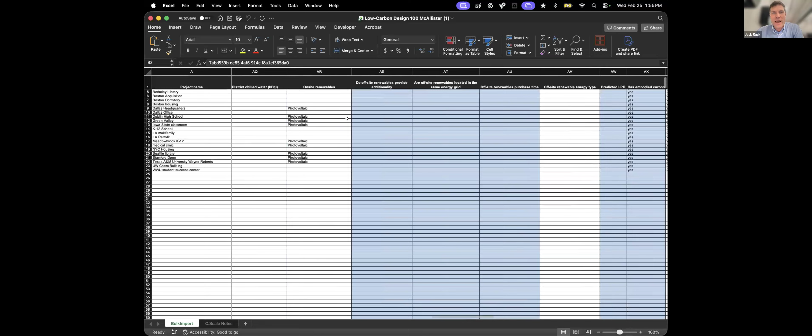Of course, the moment I'm demoing is the one where it's going to take a long time, but this will export when it's done. There it is—this spreadsheet, which I can open here. It takes this kind of gnarly 50-column DDX spreadsheet and fills it with all the data from the project for energy and embodied carbon, to make it easy to upload into the DDX.

So a spreadsheet and a PDF—really not rocket science, but tools that we're working on to help make DDX reporting easier for firms everywhere, with the idea that every firm can eventually report embodied carbon for every project that they're working on.

I'll leave it there. I'll put my email in the chat if people have questions, but again, really happy to support folks however is meaningful—even just walking them through the DDX template process. If you just want to do that, there's a lot of details there.

Thanks, Jack. Maybe one thing I was hoping you could elaborate on: it seems like there's such a range of information you can put in. People could spend only an hour getting some really high level, great information, or can do really granular work. We've had a lot of our designers—I've said, here, test this out for me—and they'll spend an hour and get pretty far on a really nice summary.